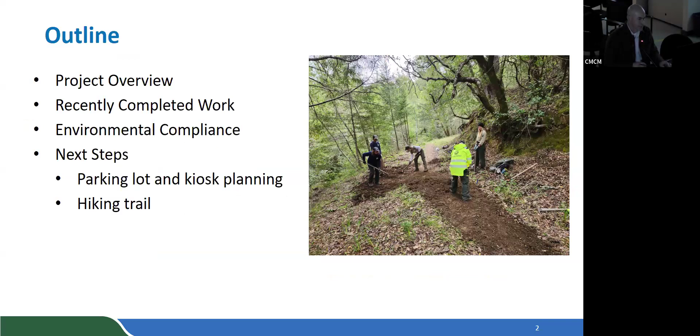Some background about the Azalea Hill Trail Restoration Project. It's 3 phases. Phase 1 is our equestrian and hiking route up and over Azalea Hill. Phases 2 and 3 are a multi-use route that bring people from the lakes area up to Bolinas Fairfax Road to connect to Pine Mountain.

The benefit of this project was phase 3 of it was an old roadbed. Phase 2 was an old social trail. And then this project also includes restoration and removal of about 4.4 miles of social trails that are in the hatched area on top of Azalea Hill.

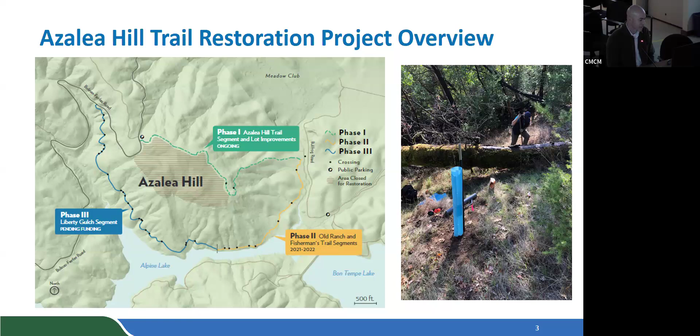This project's been well funded. We had a grant from the State Parks Recreational Trails Program for phase 3. We've been successful in receiving a grant from the California Conservation Corps North Bay for their crews to support construction on it. The EMIG Trust provided district funding for the Bullfrog Bridge, matched by some funding from the Mount Tam Fund. We also utilized volunteers to support construction throughout this project and received a donation from the Marin County Bicycle Coalition for one of the bridge features along phase 2.

There's a number of crossings along the multi-use route that we've been improving over the past year and a half or so. There are about 6 that we've identified an approach that can be lesser than what was proposed. One of the main objectives of this project was to be light on the land as we implemented the construction, to try to protect the sensitive resources out here.

And we identified some sites that could be left as is or slightly modified. So that's the subject of the addendum that we're bringing forward.

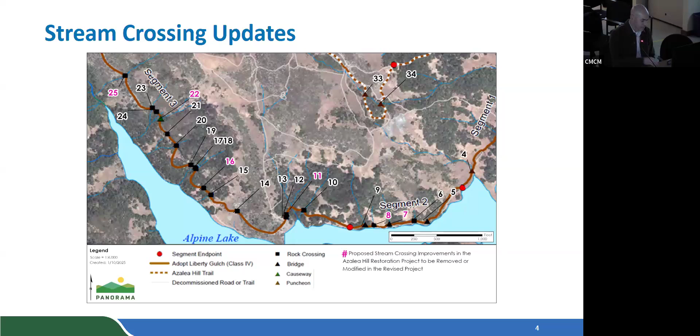To review those briefly: we've removed a bridge and been able to approach that with armoring that crossing instead of putting that bridge in. That allowed us to protect some sensitive plants in that area. We also modified Site 8 from armoring to just hand placing larger rocks at that site. It was a very small crossing.

Site 11 was a culvert that we were proposing to slip line, but that required us to bring equipment out to that site that we couldn't access it with. So in this case, that culvert is continuing to function as is, and we're proposing not to slip line it at this time.

Site 16, we're moving away from armoring that site, and it is functioning as intended, with some drainage improvements to the trail tread itself.

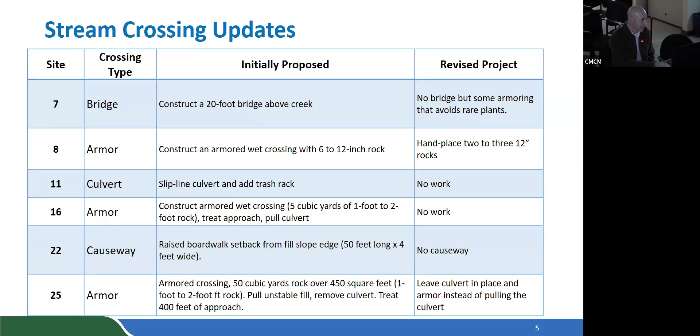In addition to that, there was a section that went through a serpentine grassland, and we wanted to protect some of the rare plants in that area. So our botanist proposed a trail narrowing section for this segment of the trail, about 288 feet. What we're proposing to do here is not widen it to that multi-use standard. It's not an ideal solution for this project, but it does protect the resources, and we really think it meets that light on the land objective.

It does mean that rangers, if they were approaching this trail with a UTV or ATV, would be using it as an out and back trail. They would approach from the lakes area or Bolinas Fairfax Road, and that was kind of a safety goal of the project, to be able to get people in and out of there in the case of an emergency. Now, for the trail narrowing section, there are additional measures that we've added to the project to mitigate that narrowing.

That is a yield sign to ensure that people are moving at a slow speed through that section, a sign that helps people understand the sensitive nature of the plants along that trail and to stay on the trail. There's also ongoing monitoring as part of the project as it was adopted originally that we'll continue to do through this segment. And if there are any impacts to plants from the use approved for this, we would mitigate it in accordance with our existing adopted CEQA document that would allow us to move forward with it.

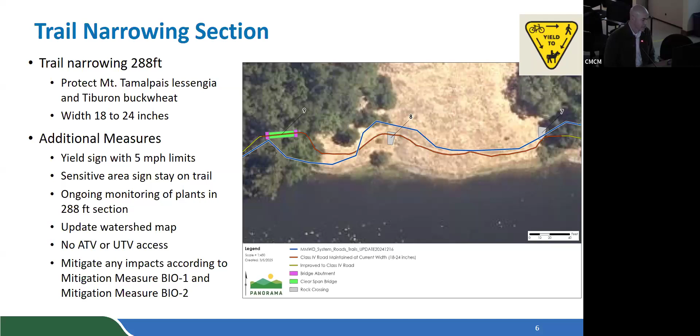So there'd be no ATV or UTV access through this 288-foot section. That's the big change. We do feel that that trail narrowing will be accommodated by our visitors, and that it'll still support their access.

So next steps for the project: we have a volunteer appreciation event on Saturday, May 3rd, around 9 to 10 a.m., and then a trail volunteer event on the heels of that. This will be for volunteers who have supported construction of the Azalea Hill multi-use route. We're also intending to open that route on May 1st, so we're doing our punch list items right now, installing the signage I just spoke about, and then that'll be ready to open on May 1st for our visitors.

We're continuing our rare plant surveys through phase 1. That's going to support the work we intend to do this coming summer for that equestrian and hiking route. We'll continue to host volunteer days throughout the Azalea Hill project. And we are moving forward with designing a parking lot at the Azalea Hill trailhead, one of the components we hope to move forward with in the next year or so. We anticipate completion of the entire phase 1 project by 2026.

And with that, we'll take any questions you might have about the project and the addendum, but we're super excited to advance this project, and we think this is a good step forward.

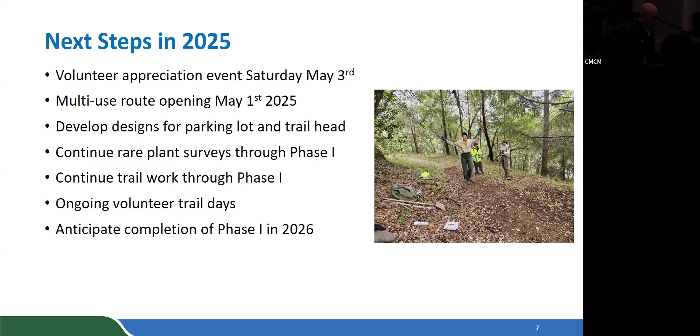Great, Sean, thank you very much. Director comments, we can start on this side. Director Russell: well, it's nice to see this thing coming to an end. It's been a long grind, and appreciate you hanging in there and keep taking steps and keep working. Thanks.

Yeah, thank you, Sean. Great to see this summary a couple of times. I think it all really is clear. It seems like the addendum, the activities outlined, are actually reducing the overall footprint of this activity, so from an environmental perspective, I hope that's a positive. I think you've identified some potential concerns if that 288-foot section is not respected by all the users. Clearly you'll be monitoring and managing that. Do include reports on how the trail use is proceeding and whether all the users are behaving as we would hope. But I imagine that if we continue with volunteer trail days, that will involve a lot of the users, which will also maintain some sense of ownership of this important asset. So thanks a lot for getting it across the finish line.

Good. No comments. Thanks. Great.

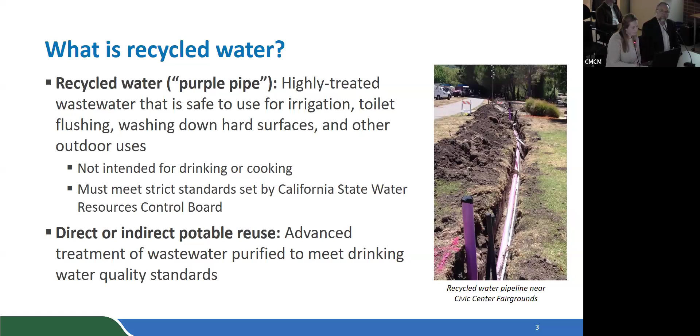So for our Purple Pipe program at the district, we've had a long history, starting back in 1975 with a pilot recycled water treatment plant in collaboration with Las Gallinas that we pushed into production quickly during the 1977 drought. Then in 1981, we built a 1 MGD recycled water plant, and had to upgrade it in 1990 to 2 MGD, partly because regulations changed and required higher quality recycled water.

That's also when we started to see an expansion in our system. Over the years, our facility in the Las Gallinas, Terra Linda area was decommissioned in 2019, and Las Gallinas built a 5.4 MGD plant that we bought into, and we now distribute water directly from that plant.

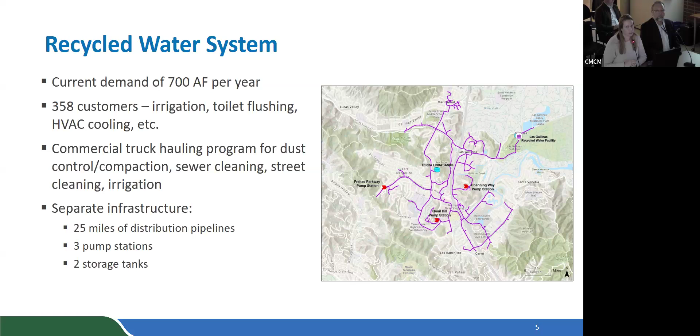So what our demand has looked like over the years - I mentioned our treatment plant was upgraded in 1990 to 2 MGD. You can see starting in 1990 through the early 2000s we saw quite an increase in demand, primarily as customers we identified switched over from potable use to non-potable use.

Over the years, we've largely seen demand in the recycled water system flatline, more or less. We've stayed around 700 acre feet, give or take, through a few droughts and recessions, bouncing up and down. That's largely without having a huge demand increase from a larger anchor tenant, such as a Chevron, or new industry coming into our residential area.

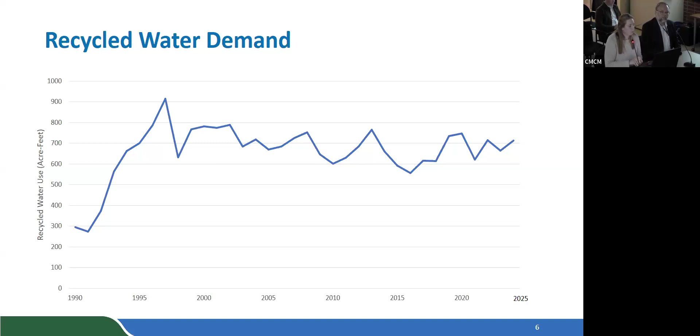When we look at ways to increase our recycled water use, there are 3 primary ways we look at it. There's infill - converting customers now on potable use to recycled water as they redevelop the property, or as they develop a lot within our service area. We expand the system either using a phased or project-based approach. Or lastly, adding a new recycled water system.

This system we currently operate is based off Las Gallinas, but there are other sanitary sewer agencies in our service area that we could work with.

Over the years, our expansion has not occurred - not without trying. There have been many feasibility studies, and the frequency has been quite often. As you can see, we have looked over the years at ways to make this work, ways to find projects that make sense, where investing capital into the recycled water system makes sense within our capital program and within the larger district.

So the investment in our recycled water system - sorry, it's not without trying. We continue to look for opportunities, even doing a study with CMSA in 2022 looking at DPR and what it would take in order to go that route.

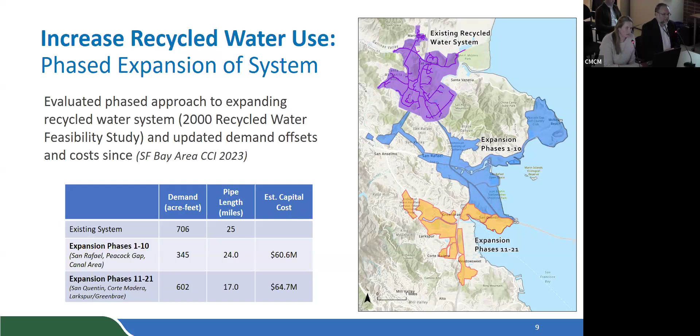I didn't realize that. For commercial, they would still need to install all the plumbing themselves - to answer your original question. Thanks.

A phased approach can be a big bite to take all at once, as you saw. We've also looked at taking smaller bites, looking at projects such as Peacock Gap, which is the most recent, and looking at ways that we can move the needle forward and expand our recycled water system through projects.

One of the most recent is Peacock Gap. We developed a preliminary design in 2022, also to be ready for any grant opportunities that came up, and looked at 3 alternative routes we could take to get out to Peacock Gap, as they are an irrigation and large user.

You can see on the map that we looked at taking it through central San Rafael and picking up a few more users, going out along the green line, through the bay, and also the blue line. Ultimately, the orange line was the selected best route, but it still came in at about 26 million for a demand of about 285 acre feet per year.

Some of the users along that route, 10 or 15 years ago, their irrigation would have been moved over to recycled water. The high schools have moved over to turf, and they don't use potable water the same way that they used to.

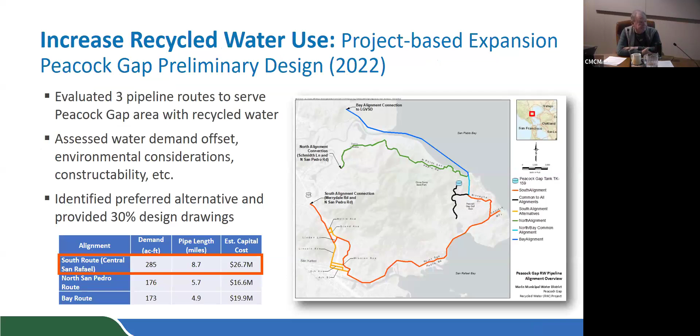Lastly, when we look at expanding the system, as I mentioned, one other alternative is to build off of another treatment plant, so CMSA, near San Quentin. With that approach, we look at what treatment upgrades would be needed, and then what the opportunities are to move any customers in that area.

We've done studies in the last 10 years with CMSA and with SASM, Sewage Agency of Southern Marin and Mill Valley. These are the top projects we've come up with for each of those studies. With San Quentin, it would be 150 acre feet per year, and that project was estimated at 11 million. With SASM, it was 81 acre feet for 4 million.

I think you should also indicate that San Quentin gave us clear wording that they felt they were being put upon in that evaluation, that they felt we were bending them into having to do it - like, we've done enough already, get off our backs. That's at least what I remember.

Have you looked at the new real estate project right between SASM and San Quentin as a potential other user here? It's another 2,000 units. Is it the Oak Hill one? Yeah, or the States building, right in between the gun range, I think. Yes, that absolutely should be a factor because that could make this much more cost effective. I think it's a really good idea.

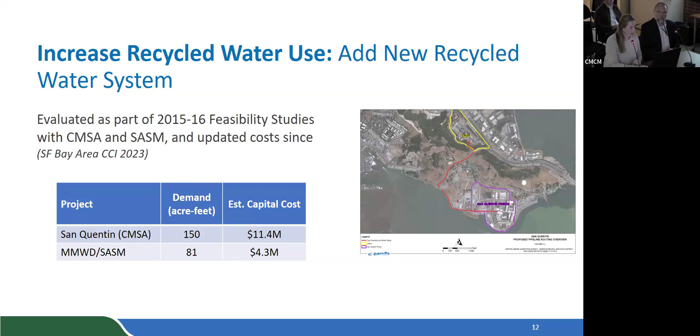It won't speak exactly about that, but kind of moving forward, we'll talk about the capacity of our current system. One of the pieces we look at is future demand when we're evaluating our existing system. You mentioned the demand closer to CMSA, but in our existing system, the reference we use is the housing element that has been updated because of the regional housing needs assessment put upon by the state.

The state came out a few years ago with a required number of dwelling units per city, per area. For Marin, it's 14,000. Within the service area we have existing in Terra Linda, we've identified about 1,700 that can be served by recycled water. About half of those are the Northgate development.

I think it's important to incorporate that too. It looks like that red line stays on the San Rafael city boundary, the top line going across the map.

There's significant interest in developing the St. Vincent Silveira property, the Marinwood, and all the way out Lucas Valley Road by Old Juvenile Hall, and some of those areas, which I think are going to be significant numbers, not comparable to Northgate, but somewhat close. It's a good point, and it's another piece of what we can look at as we move forward.

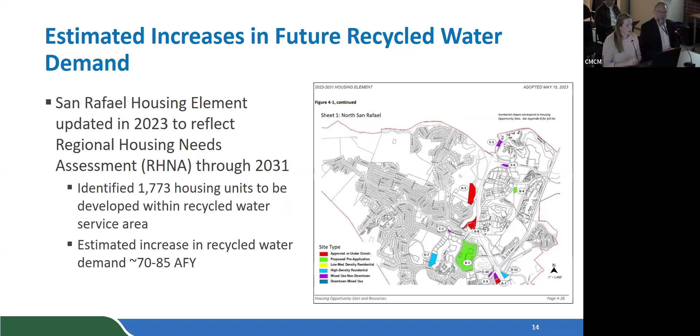RHNA is an assessment projecting needs that should be built by 2031. So we've included it in our urban water management plan. We're looking at it for recycled water, but we all can guess what will happen over the next few years. So it's important for us to look and make conservative estimates of what the capacity is.

With recycled water and thinking about capacity, recycled water is a bit more dependent on irrigation and follows the irrigation pattern than our potable water. During the summer months, May through October, we see a little bit over 75% of our total usage for recycled water. We actually have a little bit more than we used to in January, February, December because of the toilet flushing and dual plumbing that's happened in the last 10, 15 years. That's good to see.

But largely irrigation is the bulk, and also looking at the peak, peak is July, August. But what that means is that treatment is largely available during those off months for dual plumbing and toilet flushing. We may be constrained more when it comes to irrigation during the peak months.

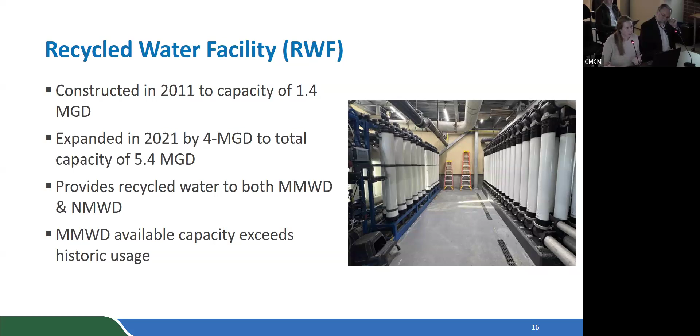The recycled water facility at Las Gallinas was constructed in 2011, originally for 1.4 MGD, and expanded in 2021 by another 4 MGD to a total of 5.4. As you mentioned, it feeds both North Marin and us. Our share is about 2.5, our contractual amount is about 2.5 MGD, and we haven't exceeded that at any point or needed to. The peak we saw last summer, which was the highest we've seen, was 1.6 MGD during the summer months.

As we see, the summer months are where we get the peak demand, the most challenging months for meeting demand. Under dry conditions, we've estimated there's approximately 1,000 acre-feet available from May through October, based on the wastewater effluent coming into Las Gallinas. So if we were to go through a dry period, speaking with Las Gallinas, what they've estimated is there would be 1,000 acre-feet over that 6-month period, about 2.2 MGD.

Does that mean the current treatment capacity exceeds their available effluent? It sounds like it's about 5,000 acre-feet per year. There's a planning level analysis we're talking about this evening that relates generally to supply and demand of wastewater, and demand on the irrigation and toilet flushing side.

When you start looking at plant design and capacities of plant design, recycled water is a little bit unique. All of that water demand generally for irrigation occurs in a very short period of time, maybe a maximum of 8 hours, between midnight and 8 a.m. What that means is your peaking factor is 3 times what your average flow rate might be.

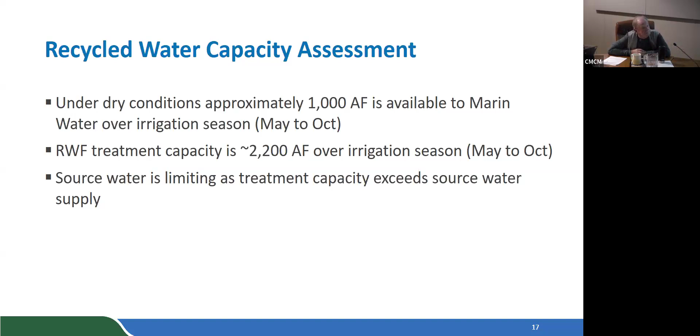And then they have membranes, which brings them. Our plant was based on this special filter used, after heavy chemical treatment, to remove the algae, then it was filtered for recycle. Theirs is membrane treated. So it's not reverse osmosis, but it's a lesser membrane, but still does a much better job than filters for removing particles. Very happy with the water quality. It's very high quality. We don't have any issues at all in the system.

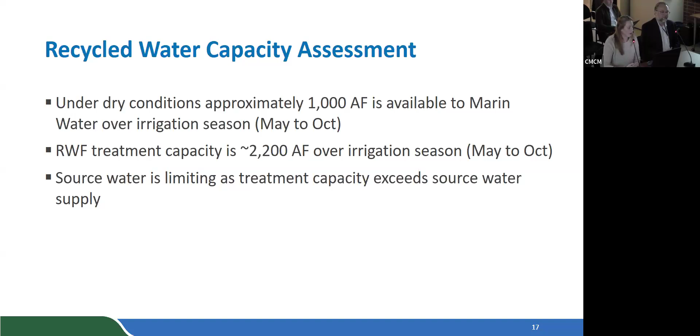During the dry period, we estimate about 1,000 acre feet over that irrigation period. And the treatment capacity, as Paul was mentioning, is much higher, about 2,200 acre feet over the same time period. So what we're finding is that the source water would be the limiting factor, as treatment capacity would far exceed it.

So stepping back, our current demand averages about 700 acre feet per year, with most of it occurring during the irrigation season. Any potential new developments from RHNA, we're estimating at this point 70 to 85 acre feet, but adding in County of Marin with St. Vincent up to 100 acre feet, or we would estimate looking forward. But we feel confident that it can supply the 1,000 acre feet is under the threshold. So we believe there's adequate capacity to accommodate the RHNA increases. If there were other big projects coming up that were planned, we would need to take a further, more detailed look at the treatment capacity.

So our next steps are to continue monitoring the development and opportunities to increase recycled water use in our system, and follow the industry and technology advancements, not only nearby, but across the state, especially as they get implemented. And then to update the board at future meetings on program developments and funding opportunities for the projects that we can find. So with that, I'm happy to answer any other questions.